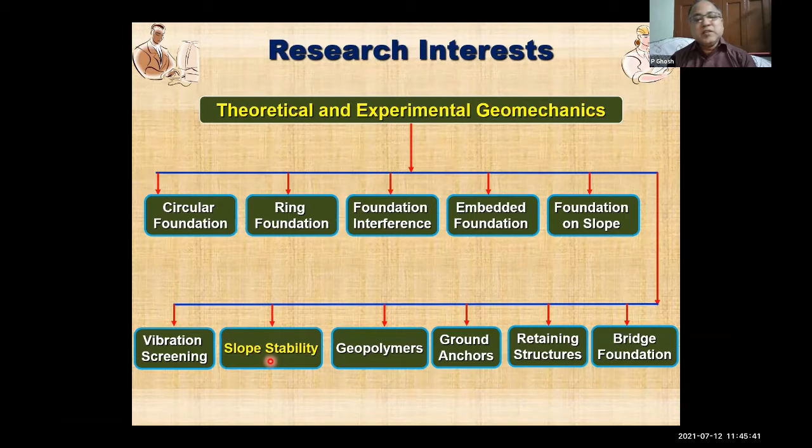Today I am going to focus on the topic of slope stability, where the slope is reinforced with micropiles. Now, why this topic? What has motivated us to work on it? The stability analysis of natural and human-made slopes under seismic conditions remains a challenging task in the field of geotechnical engineering.

As we all know, a lot of researchers are working on slope stability, and we know that landslide, slope failure, embankment failure are part and parcel of a geotechnical engineer's work. The failure of slopes under any condition may lead to tremendous loss to society, which advocates for improving the soil to enhance the stability of slopes.

Out of various ground improvement techniques, there are several, like geosynthetic reinforced ground improvement techniques, or chemical stabilization based ground improvement techniques. There are several techniques, right? Now, micropiles can be adopted to enhance the stability of such slopes. So let's see how we can place it and how we can get the enhancement in the stability.

Micropiles are generally found to be versatile for serving various functions such as seismic retrofitting and underpinning. The stability of slopes is expected to get improved with the use of micropiles, but the study on the effect of seismicity on the stability of micropile reinforced slope is limited. So that actually has motivated us to initiate this work.

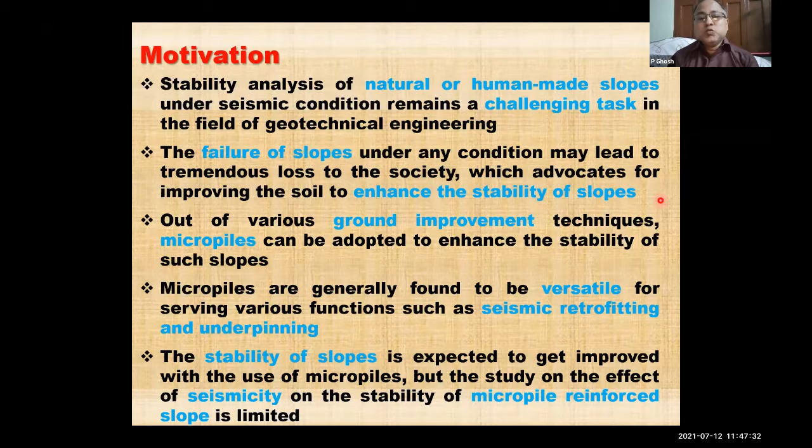Now coming to the problem definition and objectives of the present work. The problem definition is a finite slope of height H and inclination I, reinforced with vertical as well as inclined micropiles, considered under static and seismic conditions. The mechanical properties of soil include the angle of internal friction, cohesion, and unit weight of soil. So we considered both C and phi parameters. It is not purely a cohesive soil slope, rather it has both present in the soil.

We know there are several numerical techniques by which we can obtain the stability of slope. However, we have used the limit equilibrium method for this study, coupled with the original pseudodynamic approach, which was originally proposed by Steedman and Zeng in 1990, and later several researchers worked on that and improved the methodology. So these two things are adopted in the analysis.

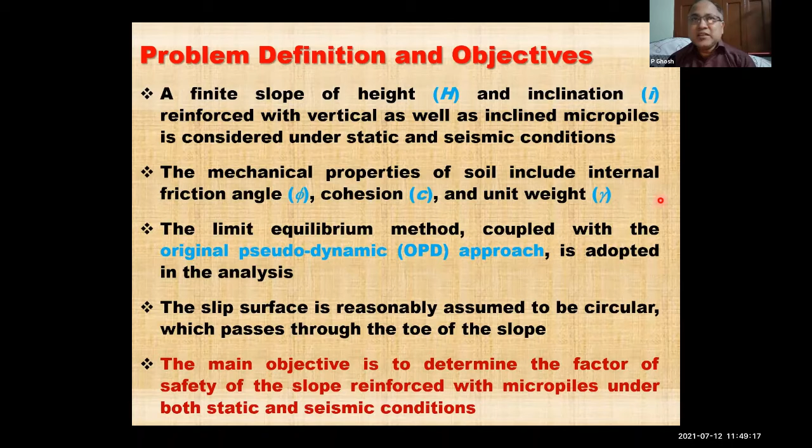The slip surface is reasonably assumed to be circular, which passes through the toe of the slope. So we are assuming only the slope is getting failed through toe failure. The main objective is to determine the factor of safety of the slope reinforced with micropiles under both static and seismic conditions. So this is the basic objective of the present work.

Now coming to the failure mechanism adapted for this study, and the associated forces for both vertical and inclined micropile. Here you can see this is the finite slope, and this is the slope surface. Slip surface, which is reasonably circular, we assumed. And this is the micropile - this is the vertical micropile, and in this figure, this is the inclined micropile.

The seismic inertia forces, like vertical and horizontal seismic inertia forces, are calculated based on the original pseudodynamic analysis. We considered the wave velocities like shear wave velocity and primary wave velocity, and also considered the amplification of the seismic activities from the base of the slope to the top.

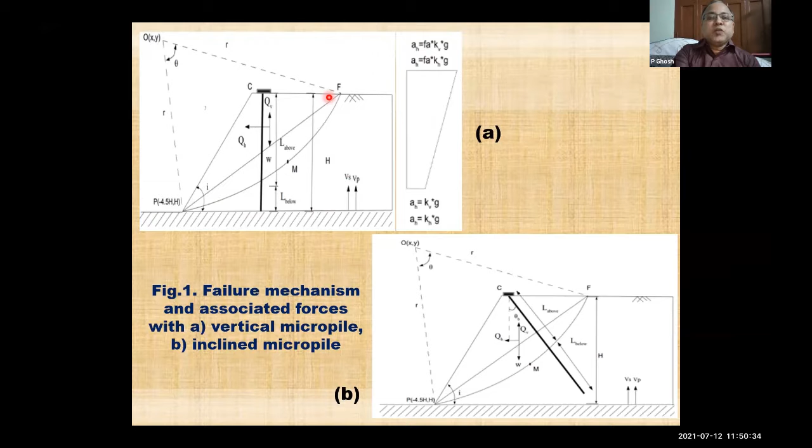Now we consider the slope is resting - so these are the assumptions we are coming to. This slope is resting on a reasonably rigid layer, and the height of the slope is H, capital H. This is also finite.

Now coming to the assumptions, as I told you, this is the initial work we started. So to start with something, we need to have a few more assumptions, and we are working on the relaxation of these assumptions in subsequent works.

The shear modulus of soil is assumed to be constant throughout the height of the slope. The length of micropiles is considered to be uniform and always intersects the slip surface. The resistance of the pile cap is not considered in the analysis, and the micropile is assumed to be a fixed head pile. Location of the micropile is assumed at the top of the slope.

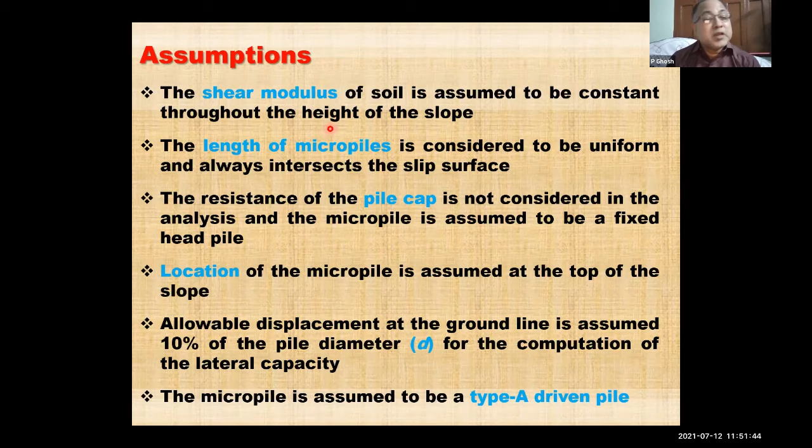Allowable displacement at the ground line is assumed to be 10% of the pile diameter for computation of lateral capacity, because we need to obtain the capacity of the micropile, which will be included in the analysis. So we need to assume something regarding the serviceability of the micropiles. The micropile is assumed to be a type A driven pile.

Now coming to the methodology. We calculate the seismic accelerations based on the OPD approach proposed by Steedman and Zeng in 1990. We considered the horizontal acceleration through this expression and the vertical acceleration through this expression. If we remove the amplification factor FA, or remove the time dependency of the wave, it boils down to the pseudostatic approach, which is well known in the community. Through these two equations, we calculated the horizontal and vertical seismic accelerations, which were included in the analysis.

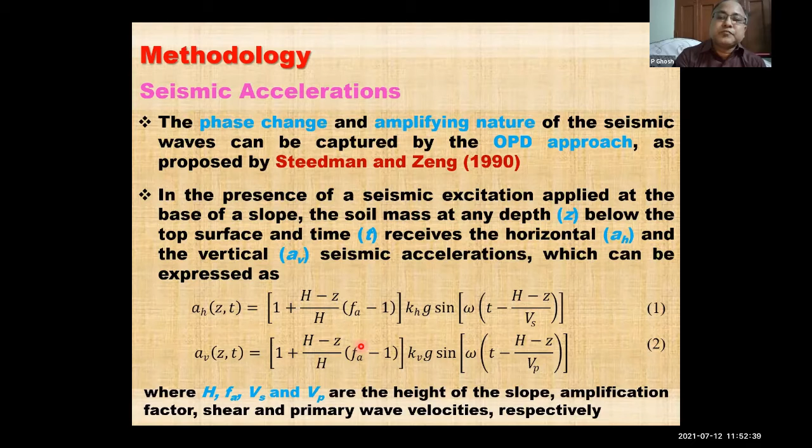Now coming to the stability analysis with vertical micropile. The detailed derivations I am not going to show here, that is available in the paper, so interested people can refer to the paper for getting the derivations.

However, by considering the equilibrium of forces, the factor of safety can be expressed by this expression, where you are having the soil resistance, the micropile resistance, and the seismic forces, inertia forces, and the weight of the soil chunk or soil wedge, which will be disturbing the slope stability.

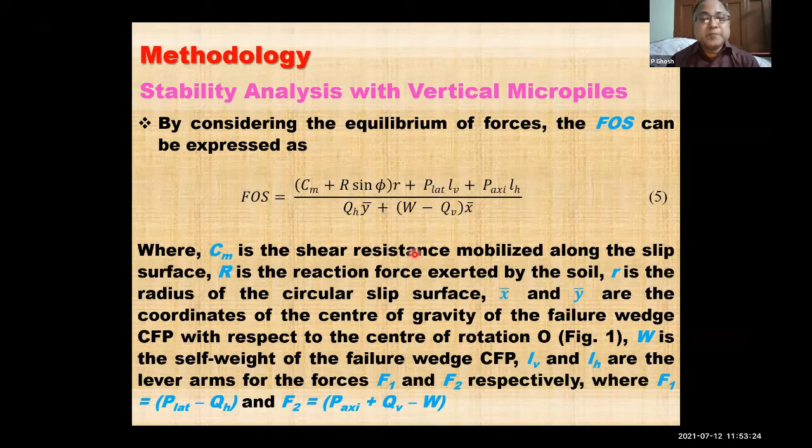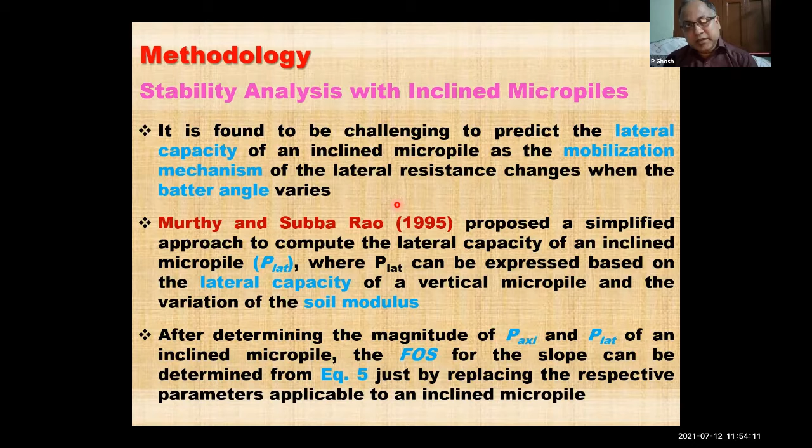Now coming to the inclined micropiles, though everything remains same, only the calculation of the lateral force in the inclined micropiles is a bit different. So that we have taken from Murthy and Subba Rao 1995 paper, and based on that we determined the lateral capacity of the micropile. Then after getting the reasonable expression for P axial and P lateral for the micropiles, the same equation I have just shown for the vertical micropiles applies. So by calculating suitable values for the inclined micropiles, we can use the previous expression for getting the factor of safety.

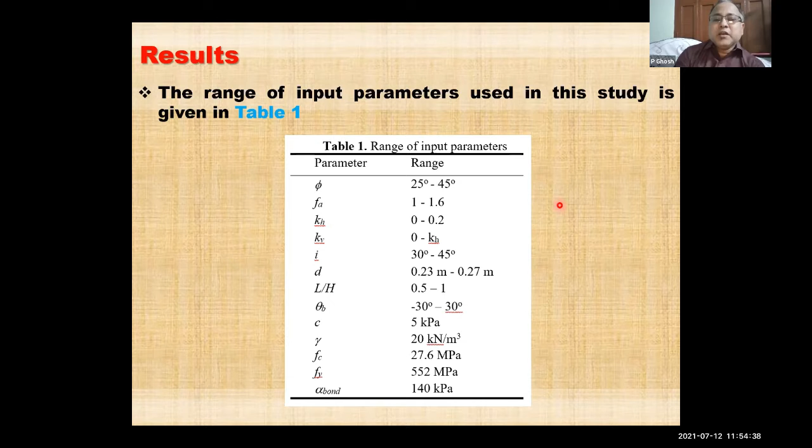Now coming to the results, the variation of factor of safety with KH, which is the horizontal acceleration or seismic acceleration coefficient, for a slope with vertical micropiles is presented in the following figure. It can be seen that the factor of safety decreases significantly with an increase in the magnitude of the acceleration, which is quite obvious, because as seismic acceleration increases, your factor of safety should go down, and it decreases, and you can see it is getting affected significantly.

Now, we have put two limiting conditions: seismic factor of safety limiting values and static factor of safety limiting values, and these two values are taken from FHWA, the Federal Highway Administration, as per their proposal. We put that so it can give you some idea that beyond this limit, everything is safe under static condition. However, under seismic condition, you can still go a little below, and this is the limit for the seismic condition, so to give you some kind of reference.

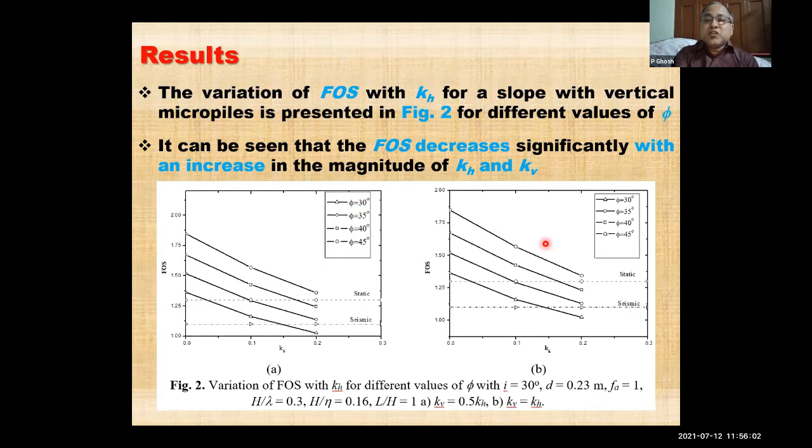So this is for different values of phi. This is also for different values of phi, but we are having different values of seismic acceleration.

Now coming to the variation of factor of safety with L by H. L is nothing but the length of the micropile, and H, as I told you, is the height of the slope.

And for different values of phi and theta b. What is theta b? Theta b is the batter angle. That is, in case of inclined micropile, theta b will be different. However, when theta b is 0, that means this is the vertical micropile. Negative theta b means the rotation of the angle between the micropile axis and the vertical axis is theta b in the clockwise direction. So this is the meaning of negative theta b and positive theta b. Anyway, that is also given in the paper, so you can refer to the paper to get the sign convention for theta b.

It can be observed that the factor of safety increases with an increase in the magnitude of L by H ratio, as L by H increases, meaning as the length of the micropile increases, you get a higher factor of safety. For different values of phi, the difference is significant. However, it is not that significant in case of theta b when theta b is rotating in the clockwise direction, meaning from the vertical axis it is rotating towards the slope face. At that time, your factor of safety is getting decreased. However, if it is going towards the top surface, your factor of safety is increasing, as you can see from here.

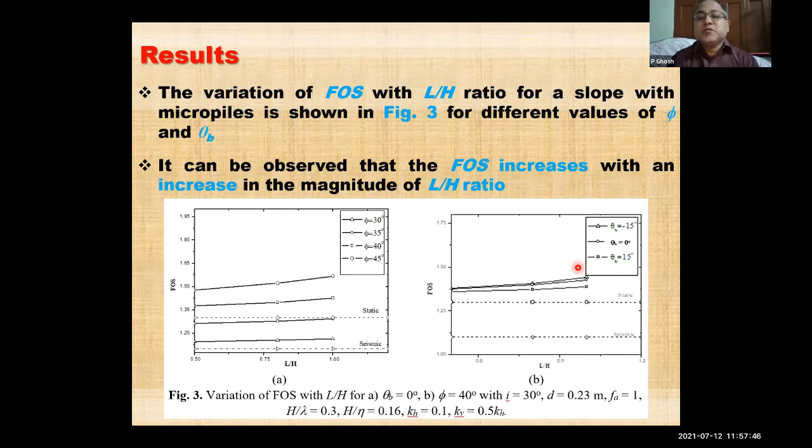Now, coming to the variation of factor of safety with KH for different values of H by lambda and H by eta, these are two seismic parameters. H we all know by this time, and lambda and eta - lambda is nothing but capital T into Vs, where capital T is the period of shaking and Vp is the primary wave velocity.

Eta is T Vp, where T is the period and Vp is the primary wave velocity. Now, H by lambda and H by eta represent the time taken by the shear wave and the primary wave to travel from the base to the top of the slope. So if H by lambda increases, that means the time taken by the waves to reach from the base to the top surface of the slope is more. That is the meaning of increment in H by lambda and H by eta.

It can be observed that the factor of safety increases with an increase in the magnitude of H by lambda and H by eta. That means if the seismic waves travel faster, your factor of safety goes down. If it takes a little bit more time to reach the top surface, your factor of safety increases.

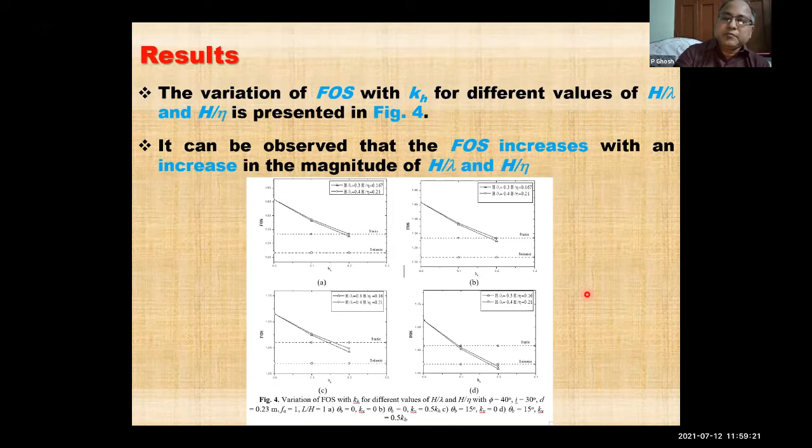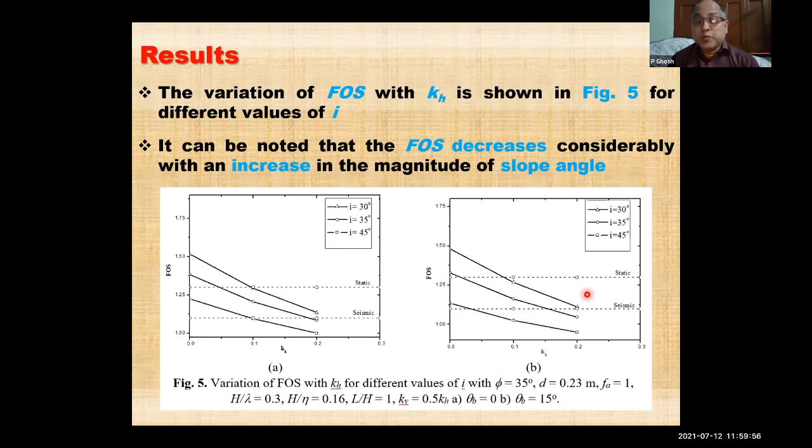Now coming to the variation of factor of safety with the slope angle. The trend here is very similar to what other researchers have already obtained, but we quantified it. As your slope angle increases, meaning the slope becomes steeper, your factor of safety decreases, which is quite obvious. This is an obvious observation, but we quantified how much decrement or enhancement happens with the variation of slope angle, and of course with the use of micropile.

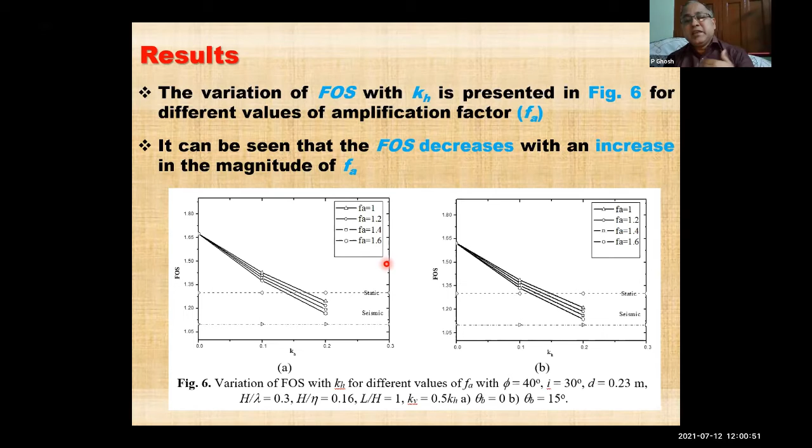Now coming to the next result, the variation of factor of safety for different values of amplification factor, FA. Here we can see that factor of safety decreases with an increase in the magnitude of FA. FA is 1, 1.2, 1.4, 1.6, because this amplification factor depends on so many factors: ground condition, soil condition, and type of shaking. We only chose the coefficient; these values were not selected from a site-specific case. Anyway, as FA increases, your factor of safety decreases.

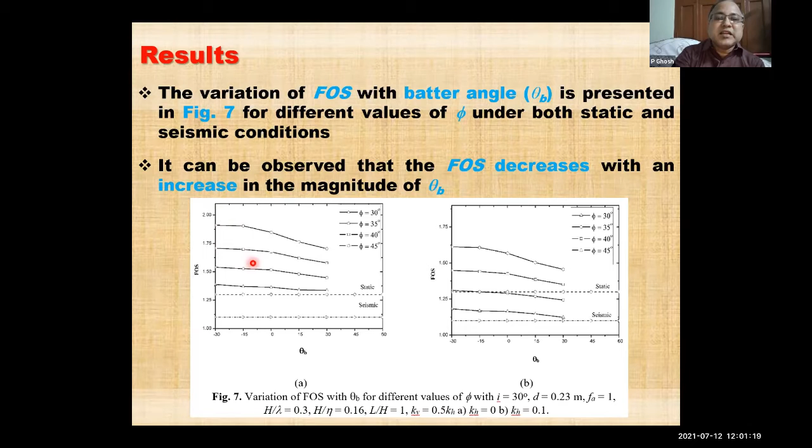Now coming to the batter angle, as your batter angle increases, going from negative to positive, your factor of safety decreases. That means if the inclined micropile comes nearer to the top surface of the slope, your factor of safety is decreasing. Initially it remains almost constant.

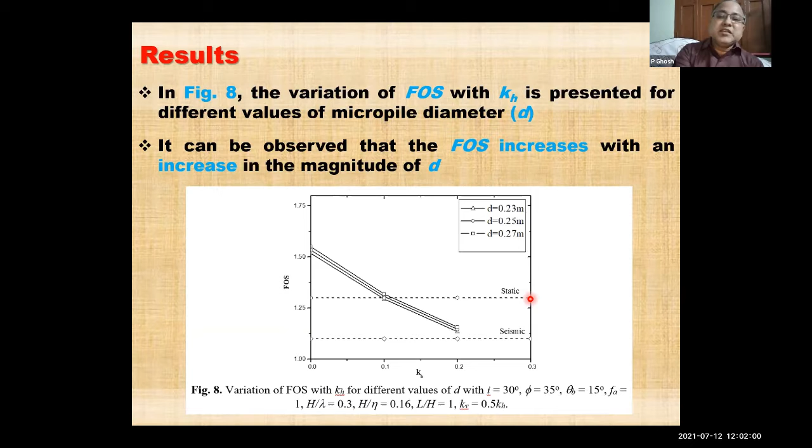Now this is the variation of factor of safety for different values of micropile diameter. We didn't assume the inertia force of the micropile, so we restricted the range to between 0.23 and 0.27 of the diameter of the micropiles. We could go to a higher diameter, but then we cannot ignore the inertia force of the micropile itself, so we restricted it here. We are working on including the inertia force of the micropile in future studies. Anyway, as diameter increases, your factor of safety increases.

Now coming to the comparison, we need to compare, but unfortunately we didn't get a proper comparison with a micropile reinforced slope under seismic condition. That restricted us to compare our present results without micropile. We compared with the very basic and conventional seismic analysis, the pseudostatic analysis, with Choudhury et al. 2007, and we can see that the present results are found to be a little higher factor of safety than Choudhury et al. This is because pseudostatic analysis gives conservative, and hence safe, results. This will always be on the conservative side, and that is reflected in this figure, showing the variation of factor of safety for different values of phi under static condition.

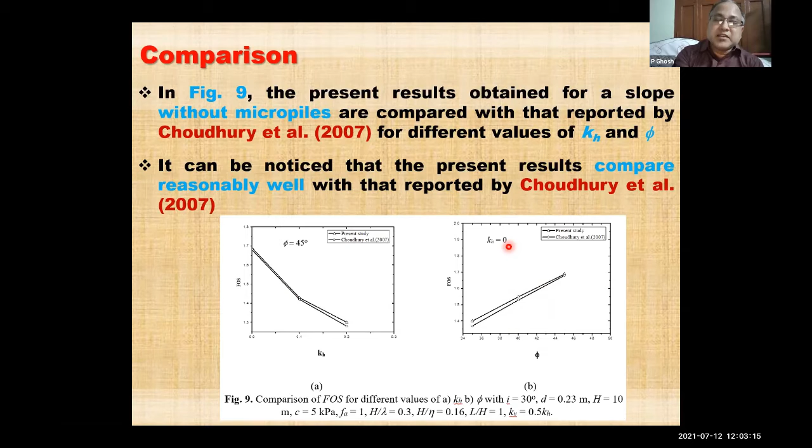Now coming to the summary part. I am not going to say conclusion because the work is still going on, so we are not in a position to give the final conclusions. But anyway, we can summarize our work as presented just now.

The factor of safety for a slope reinforced with micropiles decreases with an increase in the magnitude of kh and kv. The factor of safety for a slope reinforced with micropiles increases with an increase in the length of micropiles.

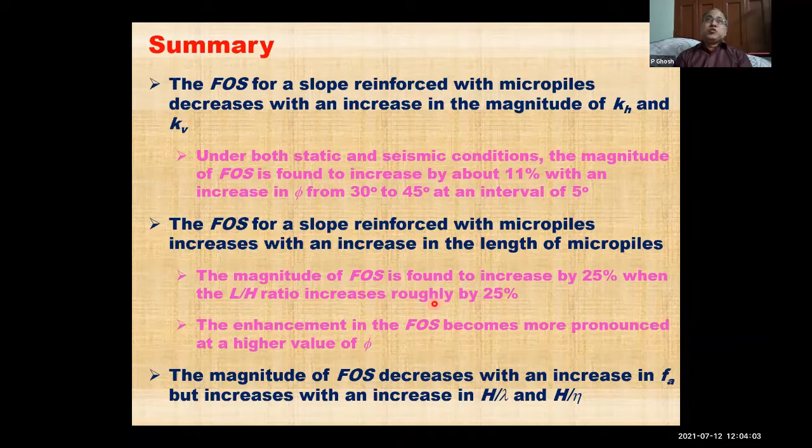The magnitude of factor of safety decreases with an increase in FA, that is amplification factor, but increases with an increase in h by lambda and h by eta, that means the time taken by the waves to travel from the base of the slope to the top of the slope. Under both static and seismic condition, an increase in the diameter of micropiles from 0.23 meter to 0.27 meter results in around 3% higher factor of safety.

Under the seismic condition, inclined micropiles are found to be more effective than vertical micropiles, as we already observed. The factor of safety generally decreases with an increase in the batter angle of micropiles, which we also observed. The factor of safety for a slope reinforced with micropiles is found to be conservative for the pseudostatic approach compared to the original pseudodynamic approach.

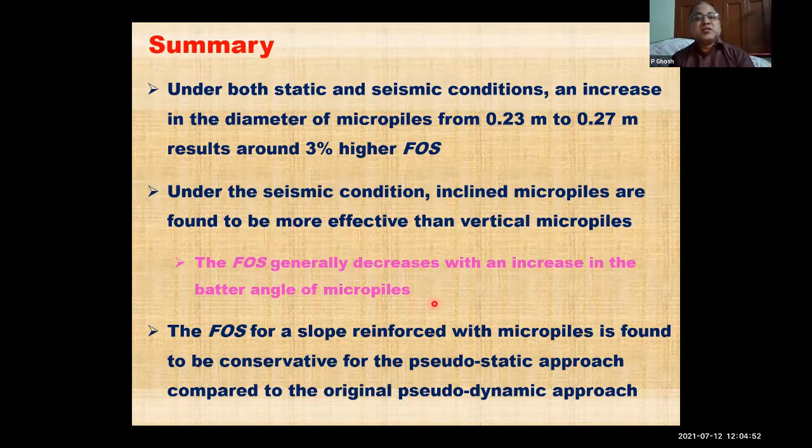Now I acknowledge the work was done by our previous MTech student, Mr. Surya Kumar Pandey, in collaboration with my colleague, Professor S. Rajesh. Now, thank you very much for your questions and listening.

So, is there any question? Thank you, Professor Ghosh. Yeah, it was indeed a very nice presentation. Professor Ghosh, very interesting presentation.

But in all these cases, it appears, what is the saturation condition, any saturation or wetting due to rainfall or anything? Yeah, so at this moment we didn't consider any water actually. Water-soil interaction we didn't consider. So if we consider that thing, we need to obtain the excess pore water pressure. All those things will be coming or will be disturbing the stability, of course. So that we didn't consider at this moment.

So that is another assumption that we made. In this particular slope, we considered everything is in the dry condition and there is no interaction of water at this moment. However, that is another scope of study, I mean we can include water and see how pore pressure is affecting the stability. Of course, yes, but at this moment we didn't consider it in this study. It is highly impossible to maintain them in that condition for a long period of time. So naturally, the factor of safety will be varying.

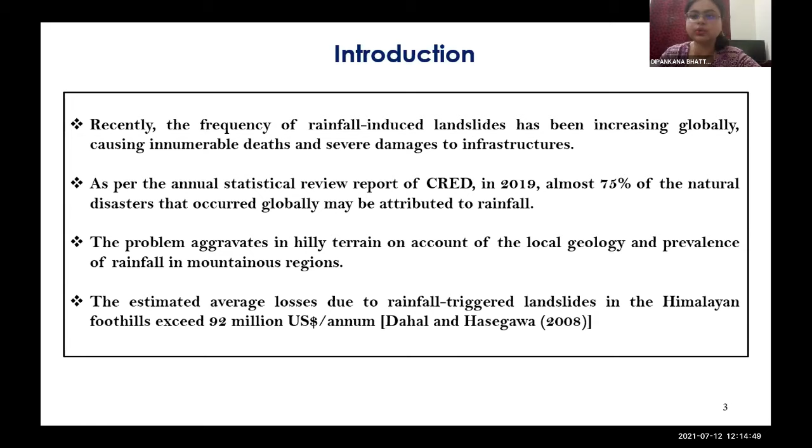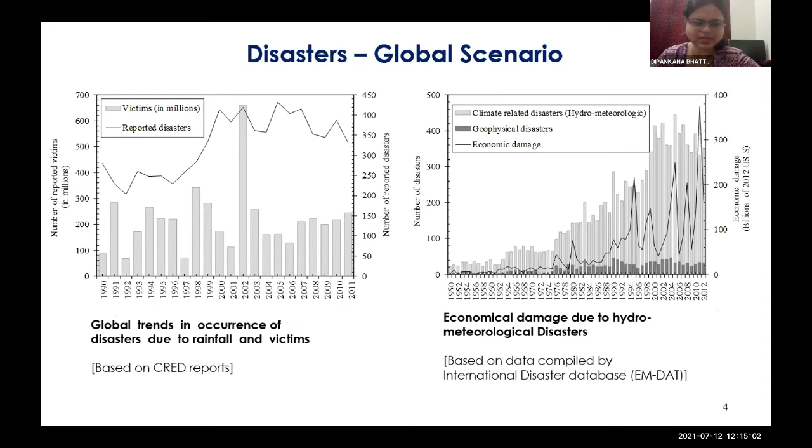To bring out the research relevance, nowadays with global warming and associated climatic changes, the environment has been affected very adversely, resulting in the frequency of hydrometeorological disasters increasing significantly. This has led to many incidents of instability of natural and engineered soil slopes and walls. Specifically in hilly terrain, if we look at data from the Himalayan regions, the frequency of rainfall-triggered landslides, fatalities, and infrastructural damages are huge, which brings out the relevance of the research problem. These are statistical compilations from agencies like CRED, the database compiling international and national disaster databases.

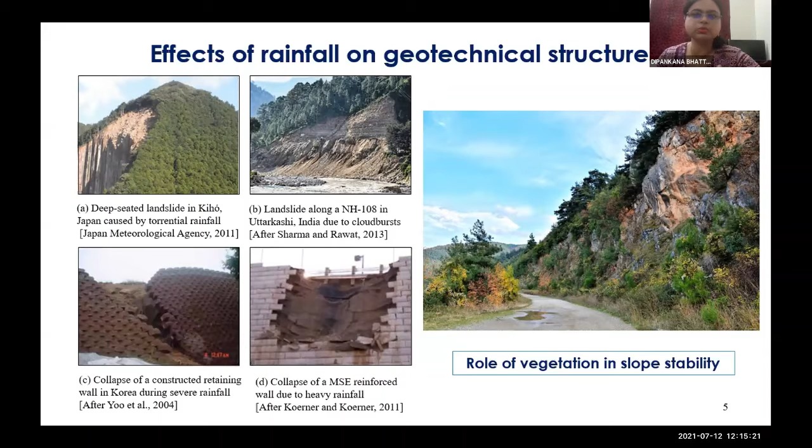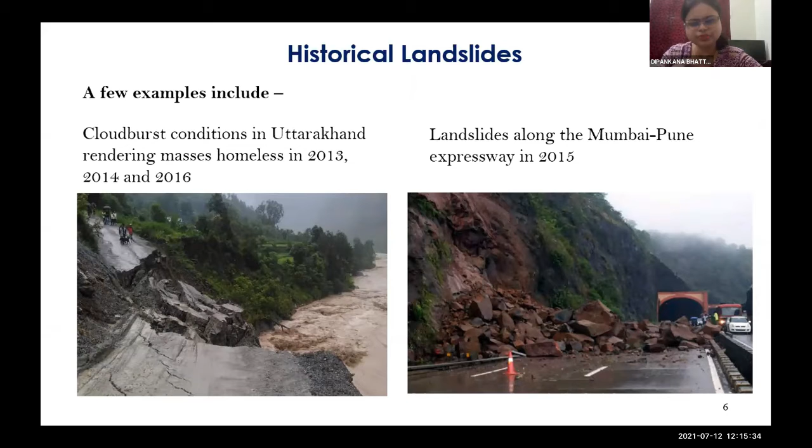Secondly, we have some pictures highlighting the huge infrastructural damages that were happening. Many times it has been reported that these instabilities were attributed solely to rainwater infiltrating an otherwise structurally stable slope - simply due to rainwater infiltration, some kind of instability was initiated. These are some recent fatalities due to cloudburst conditions in Uttarakhand. Frequently, during monsoon seasons, the Mumbai region experiences a lot of landslides.

If we look into the basic failure mechanism of an unreinforced slope, as the matric suction reduces - meaning the zone above the water table - as the soil matric suction slowly reduces with the progress of the infiltration front, we see cases of slope instability triggering instantaneously. Specifically, if the fill material used in reinforced earth construction has marginal permeability - say 10 to the power minus 6 and less, that is low to marginal permeability - then the problem aggravates a lot. Why? Because nowadays we do not have permeable good quality granular material.

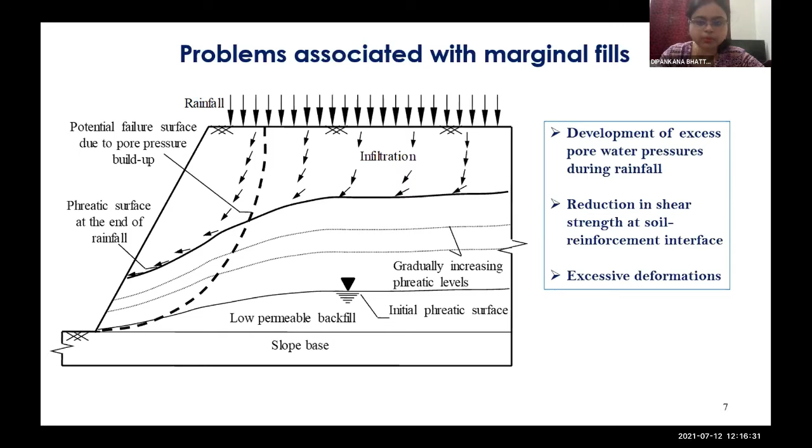Good quality permeable soil is scarce and very expensive, so we have to make use of on-site locally available soils, which usually have marginal to low permeability. My project aimed at finding a mitigation technology where we can cater to this scarcity problem by accommodating marginal soils, while also thinking of an alternative mitigation methodology.

What we aimed at was to use an innovative synthetic material, geosynthetics, which are green sustainable materials. Usually geosynthetics perform only one dedicated function, but we tried to combine the reinforcement potential of a geogrid with the drainage potential of a geotextile, resulting in a composite material we named a hybrid geosynthetic.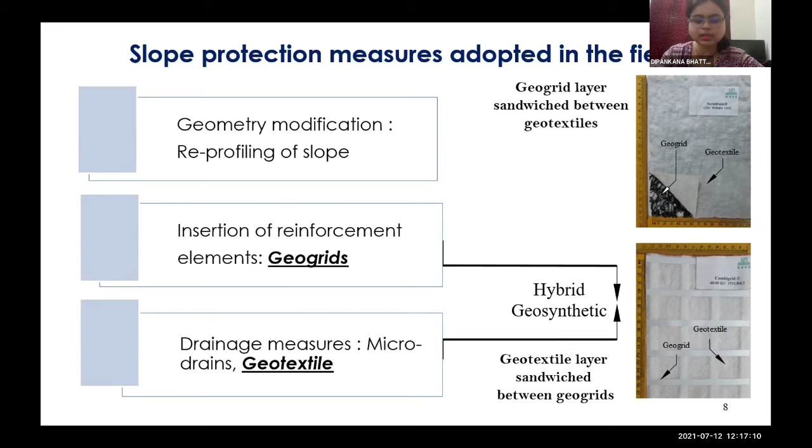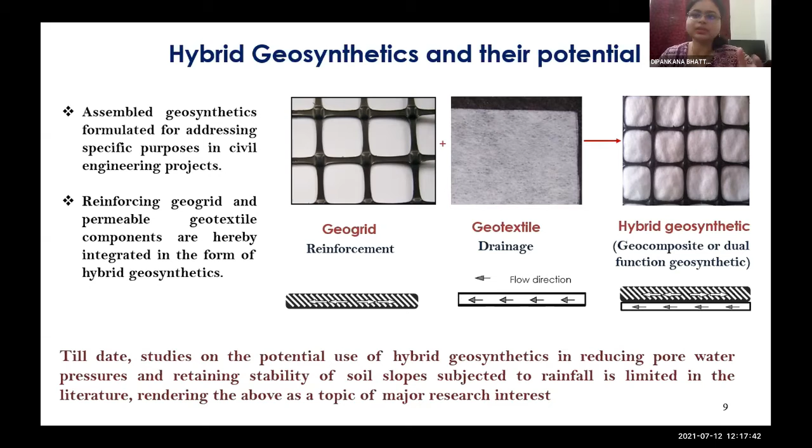We combined the reinforcement potential of a geogrid with the drainage potential of a geotextile. In our literature review, we found people have studied geogrid reinforced slopes under rainfall and geotextile reinforced slopes under rainfall separately. What happens if we couple them? Is there additional benefit? Is it economical? We searched different commercially available prototype geogrid and geotextile materials, sandwiched and combined them, and examined the improved characteristics on slope stability.

We used centrifuge-based physical modeling as a tool to replicate identical stress-strain conditions in the centrifuge model as well as the prototype. I won't get into too much detail of centrifuge modeling, but there are standard scaling laws by which we can extrapolate the model behavior to that of the corresponding prototype.

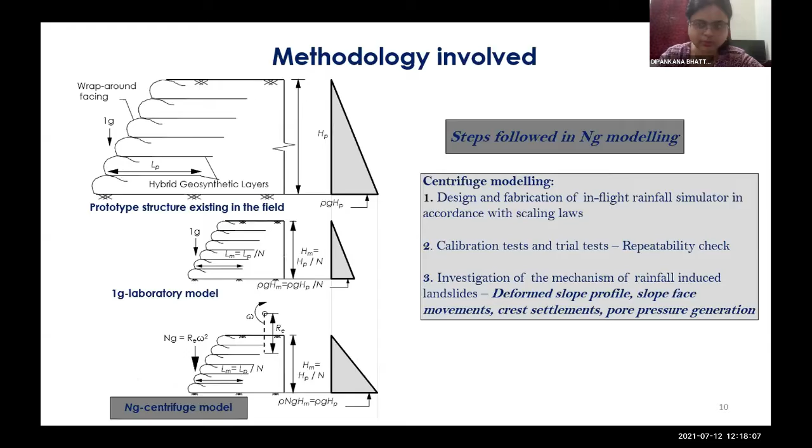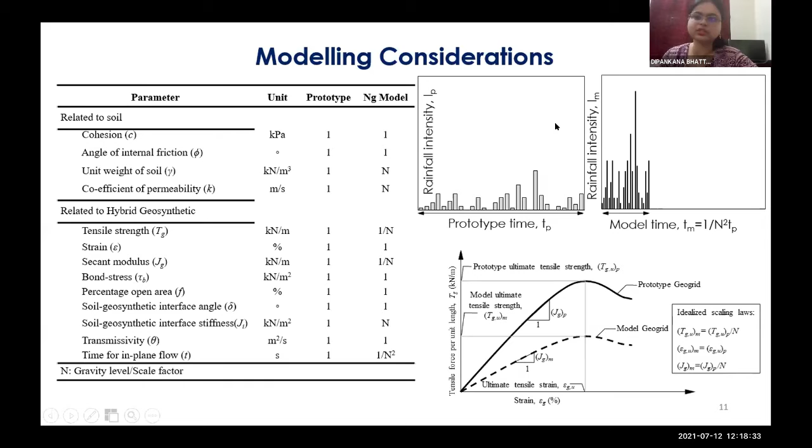Scaling has to be done for the geosynthetic material with respect to its transmissivity characteristics, attributed to the geotextile, and the reinforcement characteristics, attributed to the geogrid. Identical transmissivity must be maintained. Similarly, the tensile stiffness has to be scaled, as well as the rainfall characteristics—the prototype rainfall, when simulated at high gravity levels in the centrifuge, also needs to be scaled appropriately.

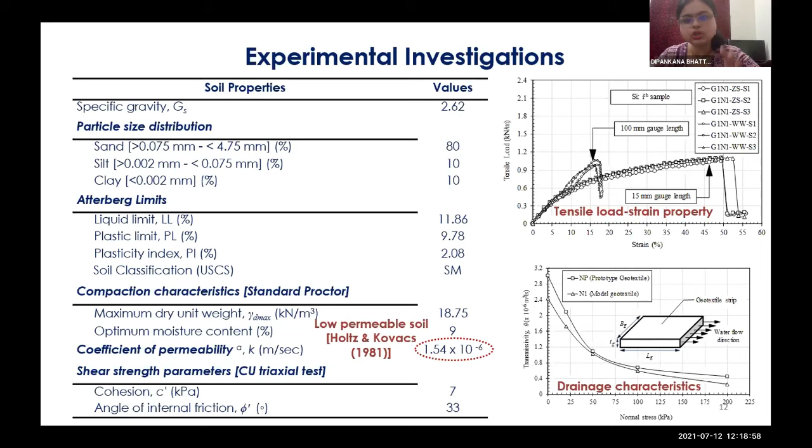Experimental investigations were done before starting the centrifuge modeling: what is the drainage characteristic of my hybrid geosynthetic, and what is its tensile load characteristic? Secondly, the soil model I chose exhibits a percentage fine of about 20 and a permeability of about 10 to the power minus 6. I blended sand with kaolin to arrive at this proportion, so it fits my definition of marginal soil.

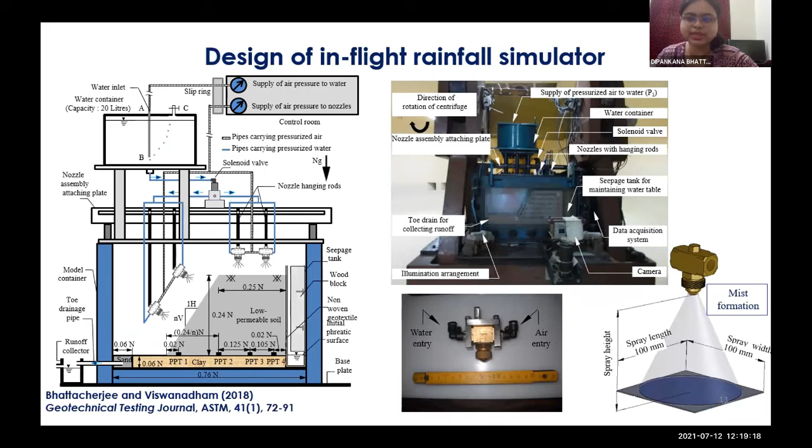I had to design a rainfall simulator with specially designed pneumatic nozzles, because these nozzles combine an interaction of air and water internally to create a mist. Unless mist is created, a lot of runoff was happening, and I was not getting the desired infiltration into the slope.

As we can see, the top model represents the unreinforced slope, which had a catastrophic failure. The rainfall I simulated was 20 mm per hour, fitting the characteristic of moderate to heavy rainfall—my simulator could simulate from 2 mm per hour up to a cloudburst condition of 80, but we stuck to the middle range of 20 mm per hour. We can see a toe failure for the unreinforced slope, a catastrophic failure within about 9.37 days in prototype dimension.

Whereas even when monitored up to a substantial time of 24 days, beyond which no more pore water pressure increase was recorded by the pore pressure transducers, nor any additional slope displacement occurred—that ultimate point was about 23.5 days as shown here—the reinforced slope is still stable without any initiation of cracking.

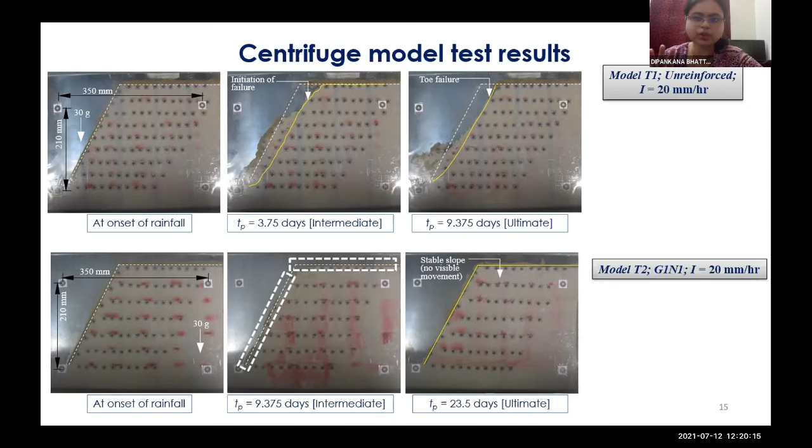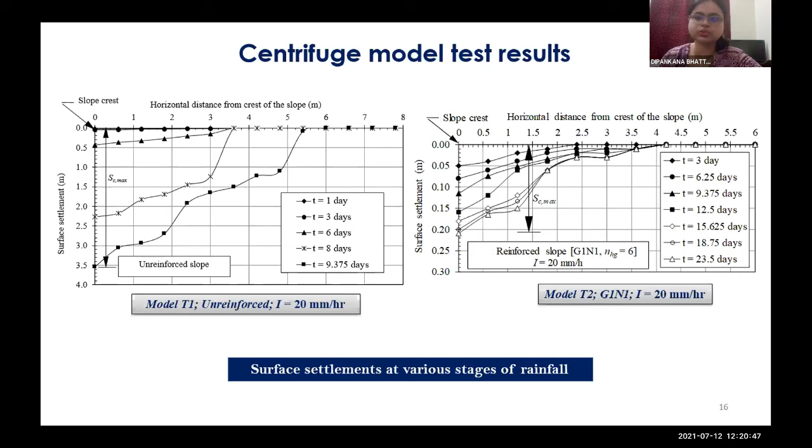We used pore pressure transducers for monitoring pore pressure buildup, and simultaneously used different plastic markers for image analysis, tracking their coordinates to find surface settlements and corresponding face movements. The surface settlements are drastic in the unreinforced slope—3.5 meters means total catastrophic failure—whereas the geogrid and geotextile components together could mitigate the slope instability, with only a meagre amount of surface settlement.

Similarly, if we track the coordinates of the plastic markers embedded within the slope face, that is also revealing that the displacements could be reduced drastically as compared to that of the unreinforced slope.

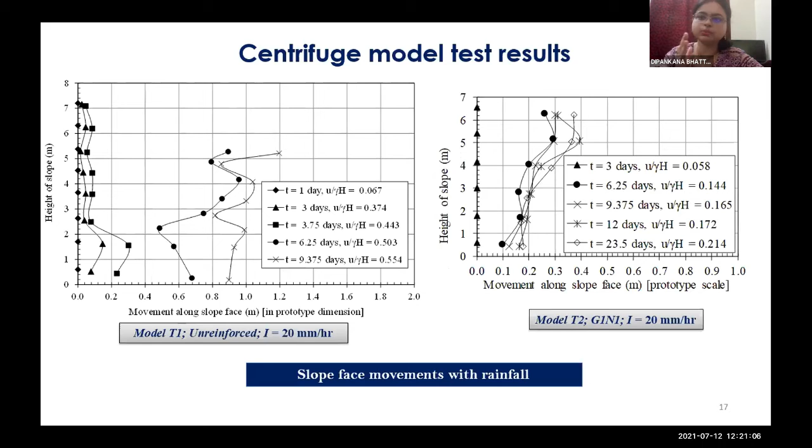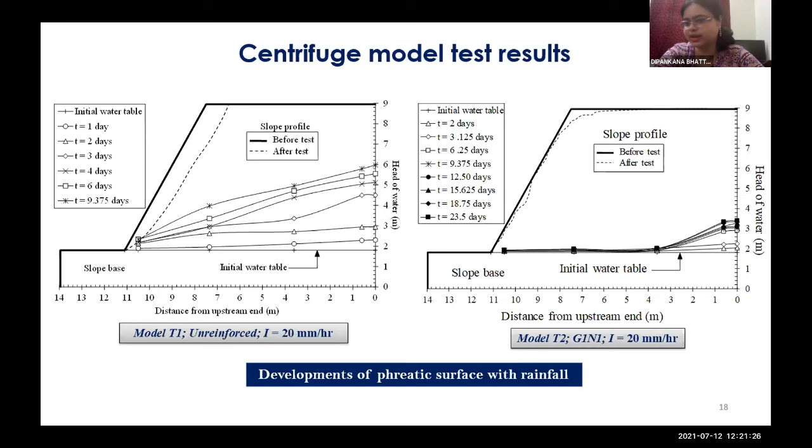So a huge pore water pressure increase occurred for the unreinforced slope, whereas that could be mitigated. Almost a 66% decrease could be observed on the right-hand side for the hybrid geosynthetic slope.

The finding is useful in the sense that we can make use of locally available on-site soils, which is economical for the project, provided we mitigate it by introducing hybrid geosynthetics or such innovative materials within the slope. Thus we can avoid the unsustainable overmining of natural sand deposits, which is presently addressed in the Indian guidelines, putting laws and regulations on excessive sand overmining.

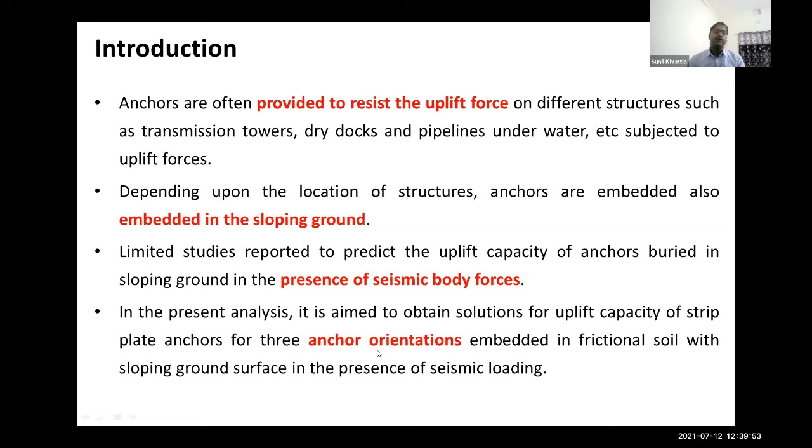Now, very few studies have been done in sloping areas under the presence of seismic body forces, like earthquake prone areas in northeast regions and parts of eastern India. Also, the anchor plate orientation affects a lot the resistance capacity, which we'll see in this discussion. So in this study, we'll see the effect of anchor plates placed in sloping ground with the presence of seismic or earthquake load, varying the anchor orientation.

So next, what is the methodology adopted here? That is the lower bound finite element limit analysis. We know that finite element limit analysis has two theorems: upper bound and lower bound. In upper bound, the load obtained is the maximum it can take, meaning beyond that it is not possible. Now, in lower bound, what will happen?

That is the safe value, the exact value, because in some problems with critical loading or critical dimensions, it is not possible to solve analytically or experimentally. So there we use numerical methods. In the lower bound, if you know the exact value, the result you get will always be on the safer side, meaning it will be like 1 to 2% less than the exact or true value. Also, there is a factor that depends on the situation or condition.

This means the conditions you have taken, because field conditions may be different from the numerical conditions. The objective function, as we call it numerically, is essentially a type of load, and that load has to be maximized subject to certain constraints, that is equilibrium equations, boundary conditions, and yield condition. Here we have used the Mohr-Coulomb yield criteria, and the seismic body force has to be applied in this equilibrium equation.

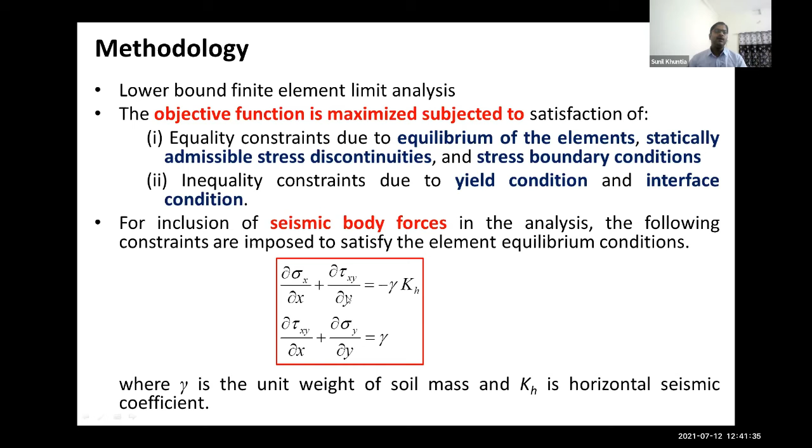Kh is the horizontal seismic coefficient. So this is the problem definition. We have three orientations: one horizontal, one parallel to the sloping face, and one vertical. The definition is represented in a non-dimensional form, that is the uplift resistance factor, F gamma s, which is the seismic uplift capacity of the anchor plate divided by gamma BH. Being non-dimensional, you can use it everywhere. On the right side, you can see the finite element mesh.

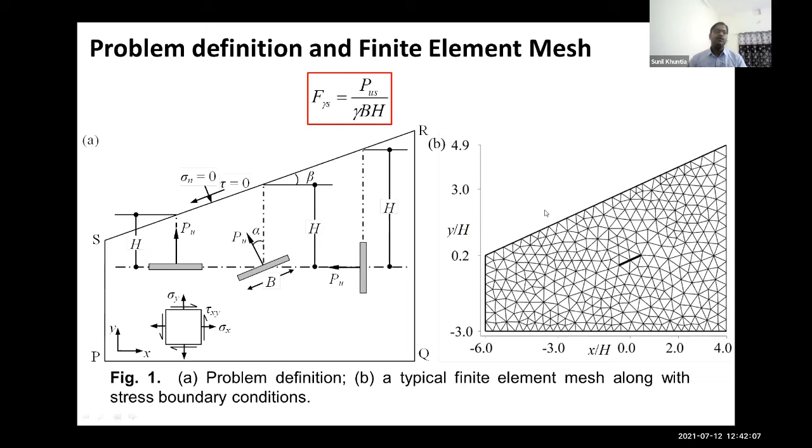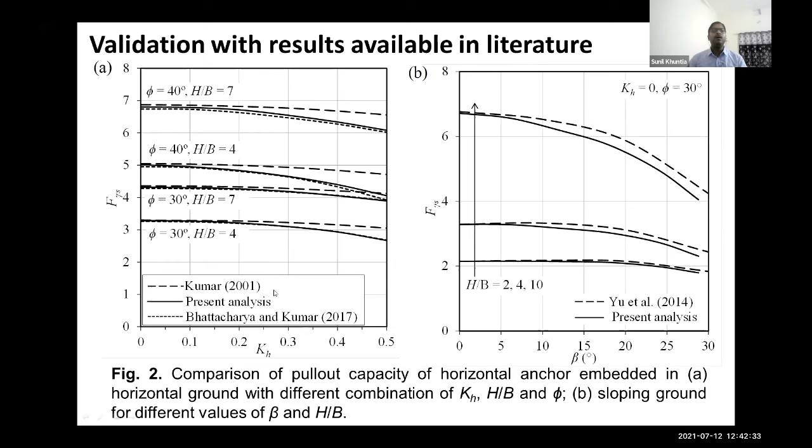Next we'll see the first validation we have done with previous literature. You can see the dark line, that is the lower bound. Bhattacharya and Kumar also used linear lower bound, but we have used non-linear methods, which is why the accuracy is higher. Kumar has done it using upper bound. Here you can see clearly that the value of lower bound is always lower than the upper bound. The first graph is for horizontal ground, the second is for sloping ground.

Next, we have to see the effect of anchor roughness. In the two diagrams, you can see in the presence of seismic force, different embedment depths show a large variation between rough and smooth anchors. The triangle represents 90 degrees, that is vertical anchor, which shows a high amount of deviation. For horizontal, there is very little deviation, and for parallel orientation, there is almost no variation observed. For this reason, whatever calculation we considered was for the smooth anchor plate, so that we get a conservative value.

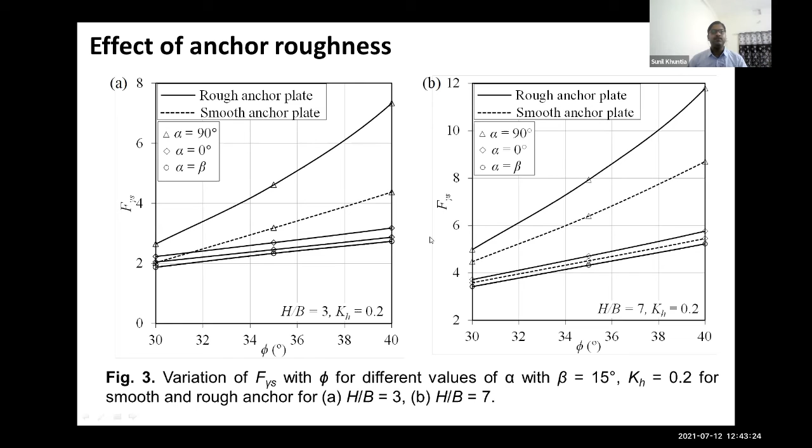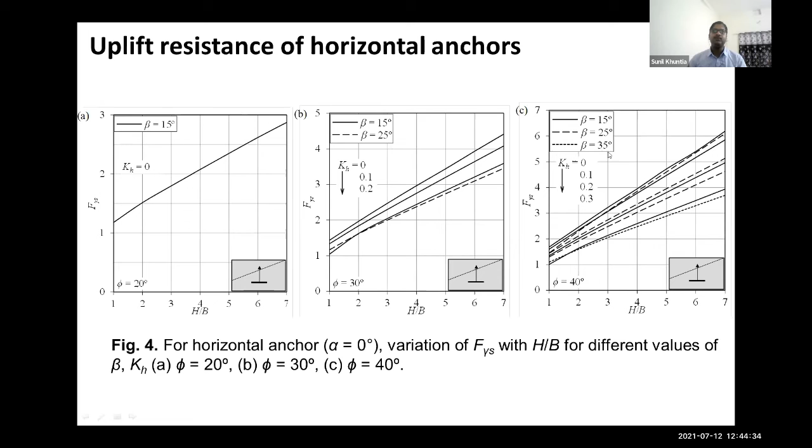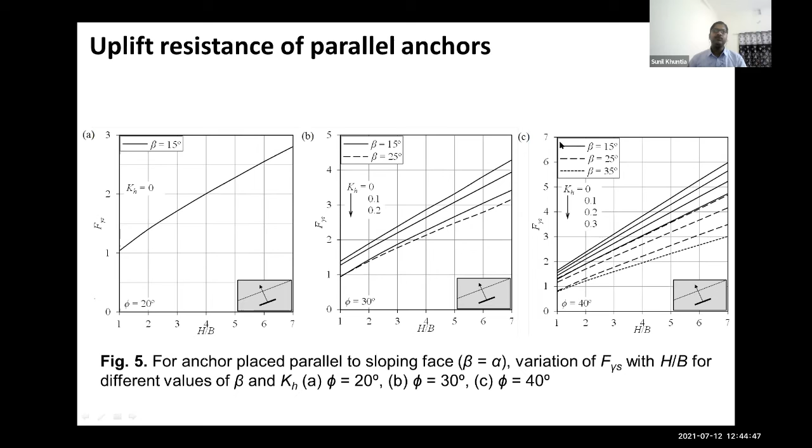So this you can also see for horizontal anchors. In the last diagram, you can see the magnitude of this F gamma S is nearly about 7, this is for parallel anchors. So the similar trend you can observe. We can remember this one also - in the last diagram, the magnitude is roughly around 7.

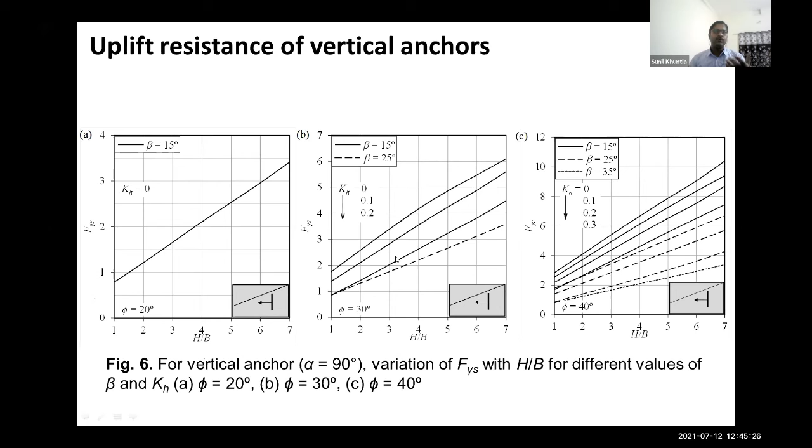So here you can see the vertical anchor plate. The behavior is almost similar, but in this figure C, this magnitude is nearly around 12. So you can see the orientation has a large effect. In case of vertical plate anchors, you will find the highest amount of uplift resistance, and other behaviors will be similar. So we need to know what trend it is going to follow for this analysis.

So in conclusion, the uplift capacity or pull-out resistance has been found to be maximum for vertical plate anchors, and the roughness effect is negligible in case of parallel anchor plates to the sloping surface. There is a very high effect of anchor roughness in case of vertical anchor plate, and intermediate effect for horizontal anchor plate.

Then another thing we have seen, due to the increase of embedment depth and the phi value, there is also an increase in the pull-out resistance, and for slope effect, due to the increase in slope, there is a further reduction in the uplift resistance. So these are the outputs of this research work.

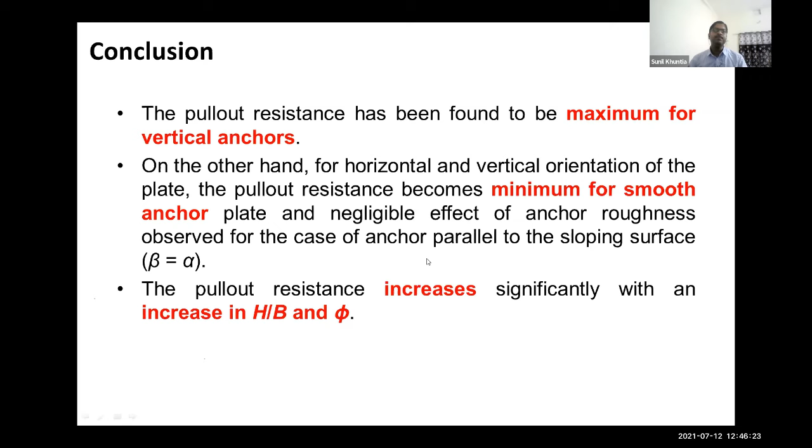Thank you, Dr. Sunil, it's actually a precise and nice presentation. Now I'll just check if we have any queries. So we don't have any queries. So does anyone else like to have any questions? Okay, because it's an interesting topic - numerical modeling is now a very famous topic nowadays.

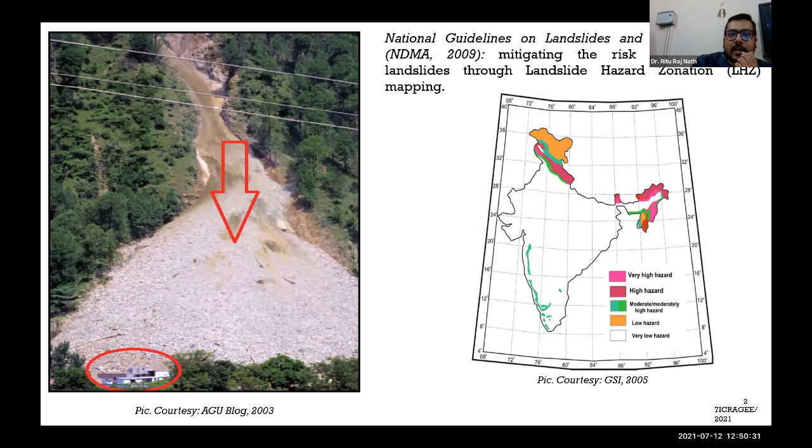This is mitigating the risk emanating from landslide hazards through landslide hazard zonation mapping. So they have emphasized hazard zonation mapping, and also accentuated integrating multi-hazards, especially seismic and landslide hazards, considering that all trans-Himalayan states are equally vulnerable to earthquakes as well. Now, seismically-induced earthquake landslide hazards present a unique scenario due to the complex mechanism and the enormity of the hazard.

We can see from these photographs the pre-earthquake Hokkaido 2018 and the post-earthquake Hokkaido 2018, and we can see the widespread number of landslides caused by the earthquake where almost one particular aspect of the slope has been eroded.

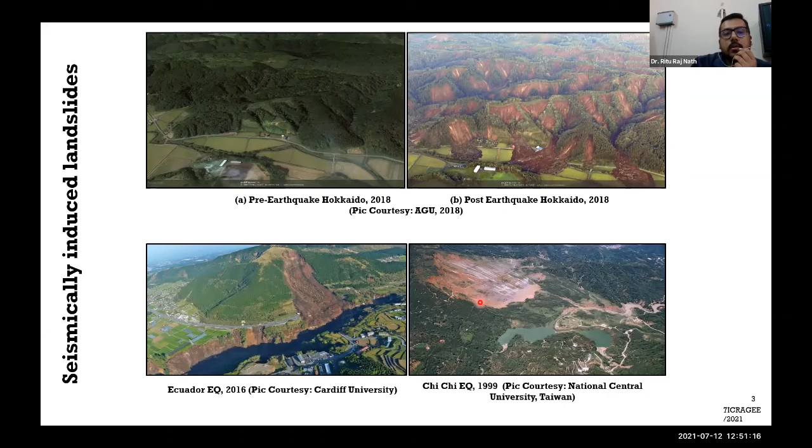Similarly, the 2016 Ecuador earthquake caused a very enormous or catastrophic landslide hazard, and the same with the Chichi earthquake of 1999. More recently, the Sikkim earthquake showed a lot of post-seismic landslide hazards.

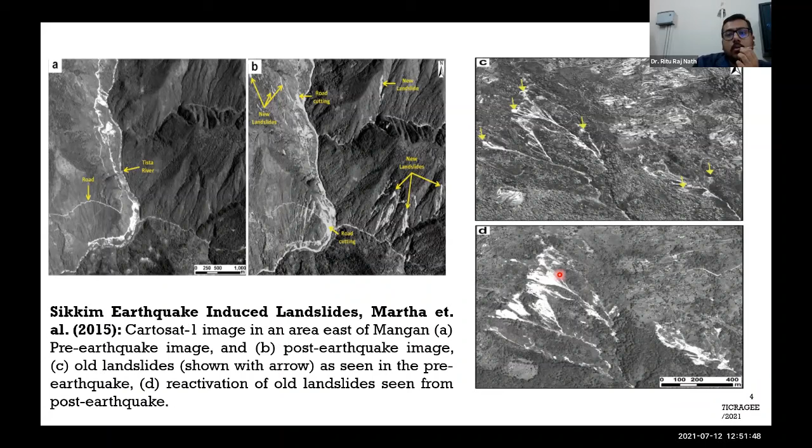We have observed that the landslides not only activate new landslides, as we can see a newer landslide has been reported, but also reactivate old landslides. Here we can see old landslides from post-earthquake which have reactivated on a larger scale.

The Himalayan region, which is very seismically vulnerable, was identified by Nadim et al. in 2006 as one of the 6 hotspots for earthquakes and landslides. We have taken this Garhwal Himalayan part, and I will discuss it later.

We can see the earthquake swarms and landslide swarms which we have mapped throughout our study. This Himalayan collision zone, the Garhwal part, is an extraordinary segment because it behaves like a decollement, and because of these high transitory stresses, it is very important that we map the seismic landslides and find out the potential of future earthquake-induced landslides.

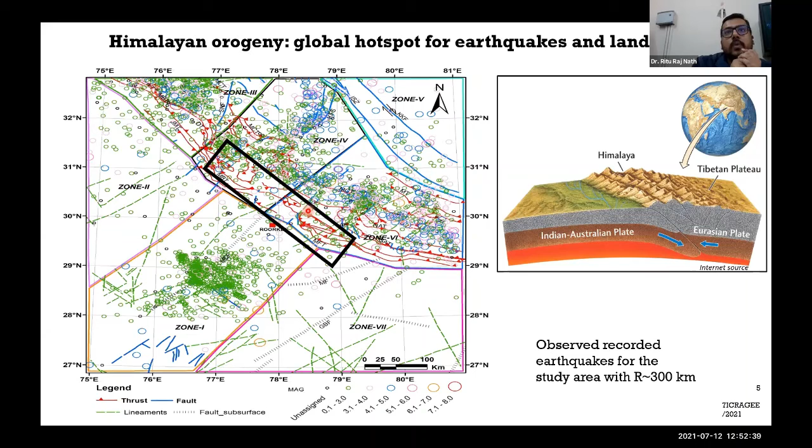Why are seismically induced landslides so important? The losses due to seismically induced landslides are generally more than those caused directly by shaking. Out of all earthquake-related casualties not directly caused by ground shaking, approximately 70% may be attributed to landslides. There are so many other studies which have shown that the impact of seismically induced landslides is long-term in nature, manifesting in indirect socioeconomic losses.

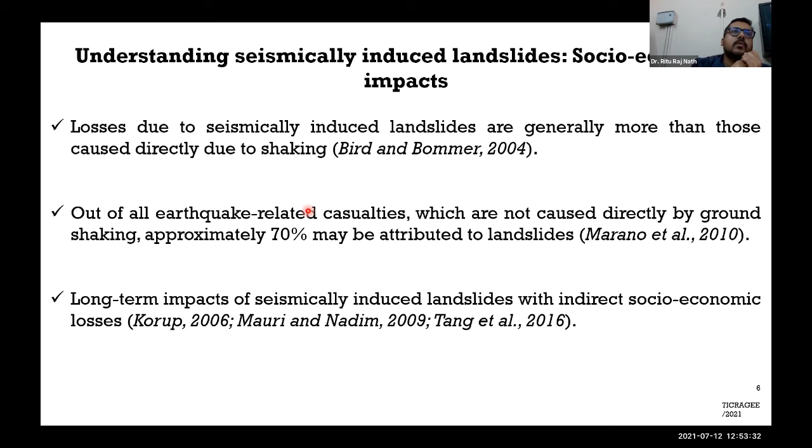With this background, it is very important to realize that the whole Himalayan region is very, very vulnerable to seismically induced landslides. To assess the current scenario, we must consider the potential earthquakes that may cause landslides in that particular region.

However, there are so many challenges when we talk about seismically induced landslide mapping, because different statistical methods widely used for landslide susceptibility zonation do not incorporate the seismic factor, as they are mostly concerned about preparatory causes. This has been ascribed to the rarity of an earthquake event.

Since large-scale earthquakes are so rare, it is difficult to generate a database where we can have an earthquake-induced landslide inventory. This greatly alters the use of AI-based methods, which is nowadays the practice where we use artificial intelligence or machine learning methods to find out the co-seismic displacements.

What we have traditionally been doing is trying to correlate the distance, magnitude, and frequency of a particular earthquake, find out the co-seismic landslide, and try to extrapolate that data to other regions. However, this is limited to the terrain investigated and the particular ground models.

So one particular earthquake originating even in the Himalaya, we cannot extrapolate the same data to other regions, because they will have different attributes: frequency content, duration, amplitude — all completely different. So one alternative would be to base it on geotechnical exploration and model with finite element models.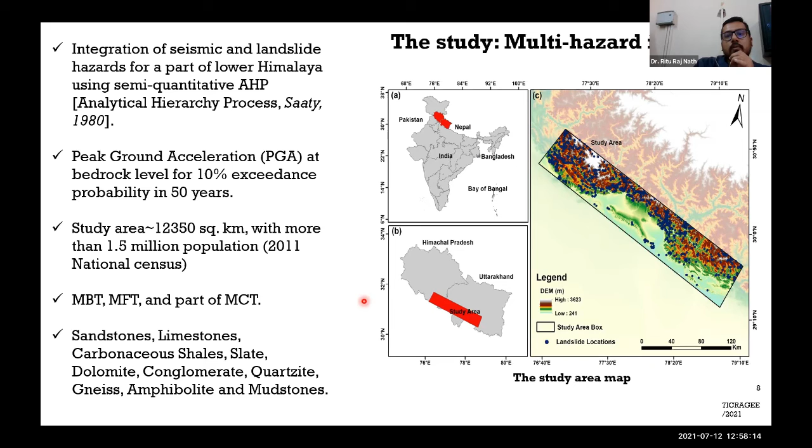In this particular area, we have 16 geological formations, and the most common rock types we came across were sandstone, limestone, shale, slate, and dolomite. This is very common and is what we observe in the Himalayan parts.

We identified the landslide causative thematic layers, or preparatory landslide causative factors, based on our field observations and past studies. Seven particular landslide factors have been used in this study. Although we also considered land use land cover as a causative thematic layer, we did not include it because there was some discrepancy with the results, and most of the land use land cover was forest area. So we discarded that and came up with slope angle.

This is the DEM. We can see that the area has been classified at an interval of 500 meters, which is the common norm in LSZ mapping. Then we have slope angle, slope aspect, drainage Euclidean distance, fault Euclidean distance, road Euclidean distance, lithology, and land use land cover.

Although land use land cover was not very much, we have seen the effect of LULC here. Then we prepared the observed landslide inventory based on LISS data, which was again verified with Google Earth imagery, and finally at select points we actually did the ground truthing.

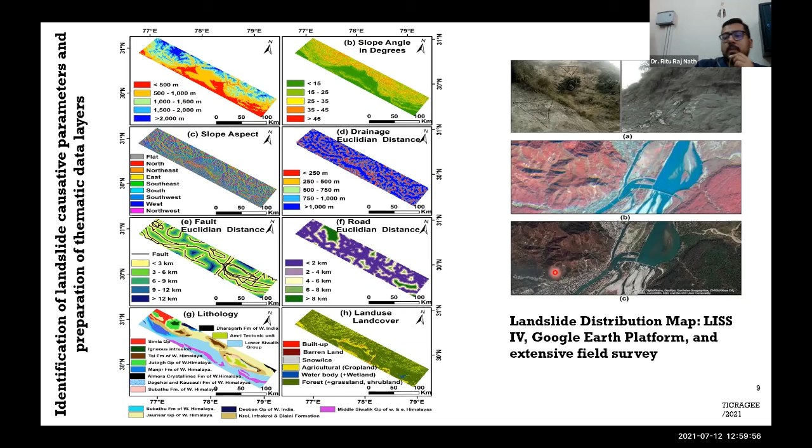This is the Mansa Devi landslide. We can see lots of landslides and slope failures initiated at these parts. This is what we observed from LISS data, and this is what we observed from Google Earth imageries. From these three, we amalgamated to prepare a landslide inventory where we identified 1062 observed landslides in that particular area.

However, this distribution map did not have data on the date of failure, and that worked as a major hindrance throughout the work. We tried to find out as much information as possible, but there is no such inventory which indicates whether these are co-seismic or rainfall induced. So we simply took it to be the observed landslide and gave it a weightage.

Now we have defined a term, and this term was actually not defined by us, it was defined by Kanungo and Sarkar in 1995, which we call the landslide potential index. The landslide potential index is derived by taking the rank and weight of a particular thematic layer and its subsequent classes, and if we numerically integrate them, we can find the landslide potential index for each pixel, which we can map easily in a GIS environment.

Based on our observation and detailed field study, we arrived at these particular ranks. The highest rank has been assigned to slope angle, followed by geology, fault Euclidean distance, elevation, drainage Euclidean distance, road Euclidean distance, and slope aspect. Slope aspect is given a weightage of 2, meaning the aspect effect in this model is considered very low. However, the angle effect, where the slope is more than 35 degrees or more than 45 degrees, is given a very high weightage.

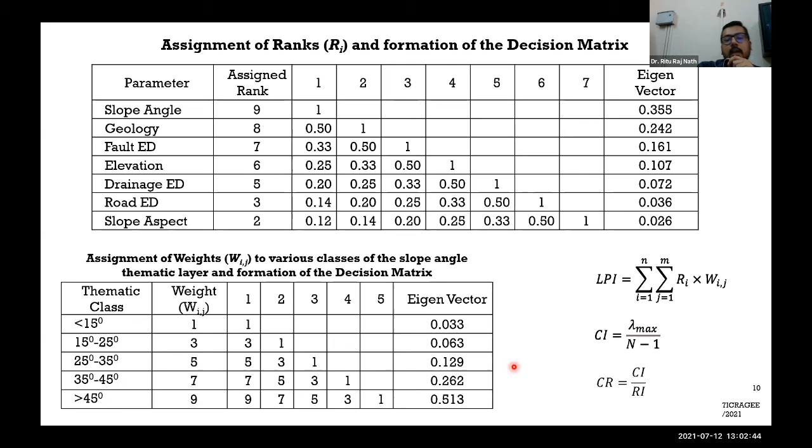And you can see that the weightage given will give me the final value, and this is correctly correlated with the physical modes which we understand.

Based, Dr. Nath? Yes sir. I think we are running out of time. Can you please wrap up? Yeah, I will complete in 2 minutes, sir. Thank you, so this is what we have come across.

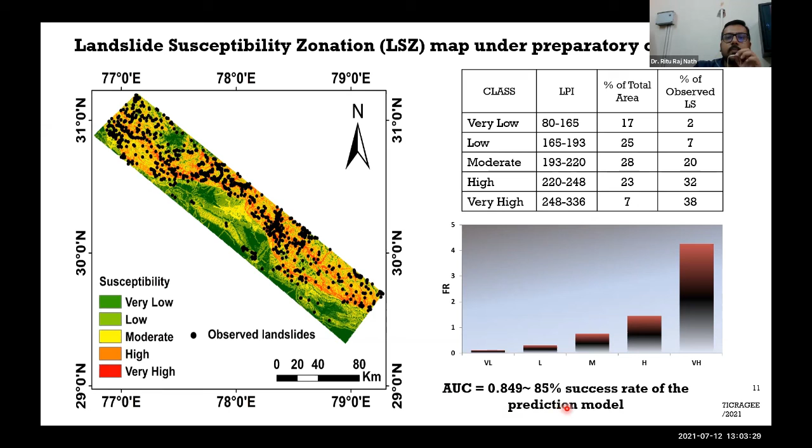This is the first part where we have not considered the earthquakes, and we have come up with this particular map where we have seen that 7% of the total area comes as the landslide hazard zone of very high susceptibility, and another 23%, so total 30% of area falls under zone of high to very high hazard. And we have found that this model can be implemented with 85% confidence level.

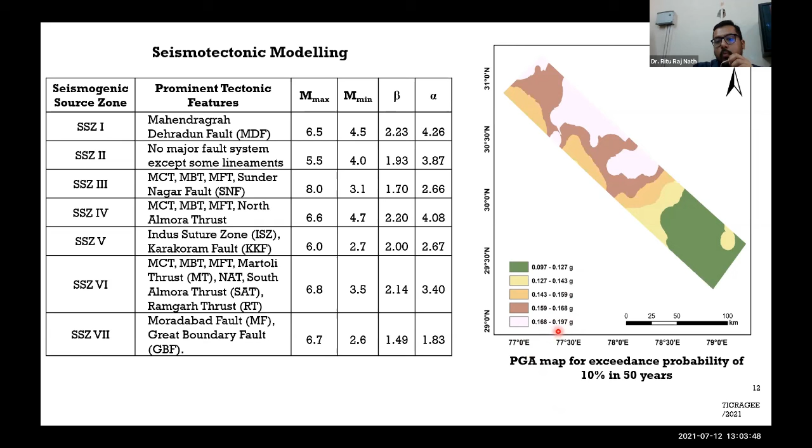So then we go with the seismotectonic model, and I'm not going to discuss much about it. We have found out that for our 10% earthquake probability, we have a maximum earthquake of PGA 0.197 G, and this has again been classified and processed the same way. We have followed the same process to find out our eigenvalue vectors.

And then we come across the seismic LPI, which will give me the landslide potential index under seismic conditions, which is a numerical integration or numerical solution of the preparatory causes, and then this is what I will get as my seismic causes.

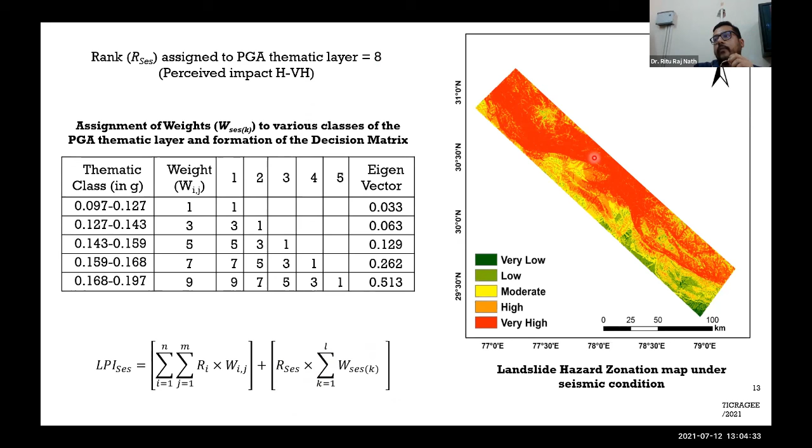Now we have assumed that considering the high Himalayan seismicity, it can have an assignment of rank 8, and then again we solve the matrix and find out that our assumptions are within the limit, and this is what we have got after introduction of the seismic forces.

Now we can compare these two, and we found some very interesting facts: once we incorporate the seismic factor, the maximum landslide potential increases by 34.6%, and the minimum one deviates by 18.3% respectively. This means that while my preparatory causes remain more or less controlling factors, if and when a big earthquake occurs, there will be tremendous and widespread co-seismic landslides expected in this particular area.

These results are again shown by the shifting of the zones, and now 51% of my study area falls under the zone of very high hazard, which was earlier only 7%. So with these two, we understand that when there is an earthquake, when we consider the seismic forces, there will be a paradigm shift of the hazard zonation from very low to very high.

That means zones which are now marked as very low zone can actually move to moderately susceptible or even high zones if we consider earthquake magnitude. And this is what needs to be considered when we actually implement government policy and infrastructure development.

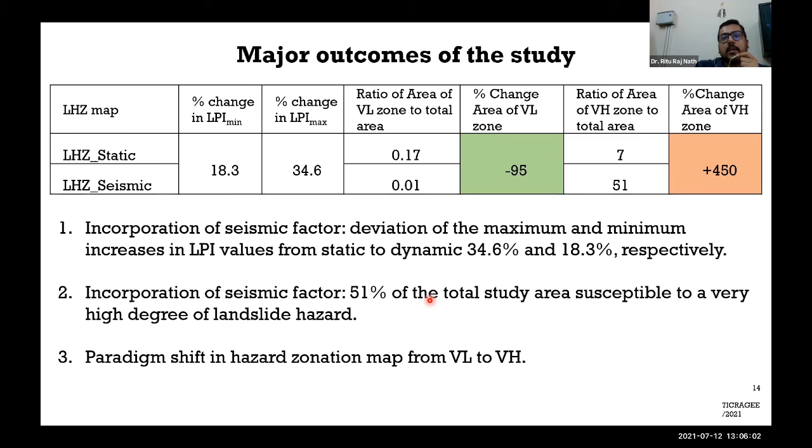So one of the findings is that integration of scenario earthquake with the preparatory factors will increase the landslide potential of the area by 35%, and there are chances that whatever hazard map we are now preparing or following for different governmental or institutional policies needs to be changed again.

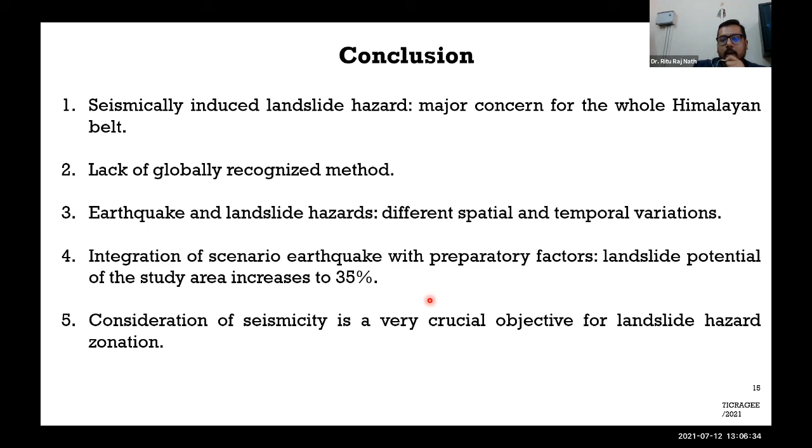So I would like to thank everyone for your time, and I would like to answer any questions pertaining to my topic. Thank you, sir.

Thank you, Dr. Nath. It was a very nice presentation indeed. Talking about landslides will always be fascinating, it's a never-ending discussion, and the work you have carried out is very interesting and very good. Thank you, thanks for such a wonderful presentation. Now I'm just checking if you have any queries or questions to be answered.